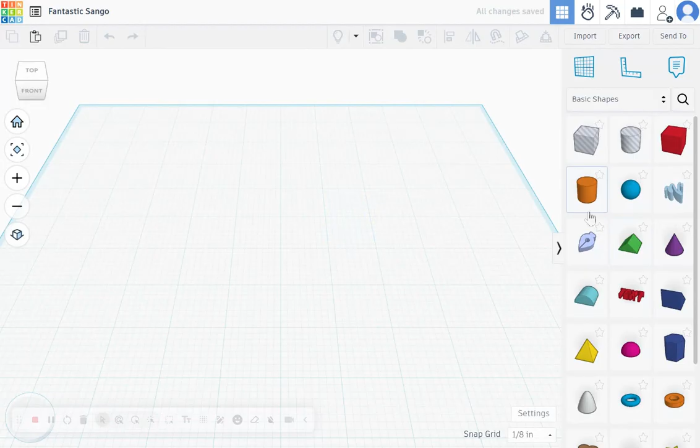When I'm in my design, the first thing I want to do is go up here to the top left-hand corner and give it a name. I want to include my first name and what I am making.

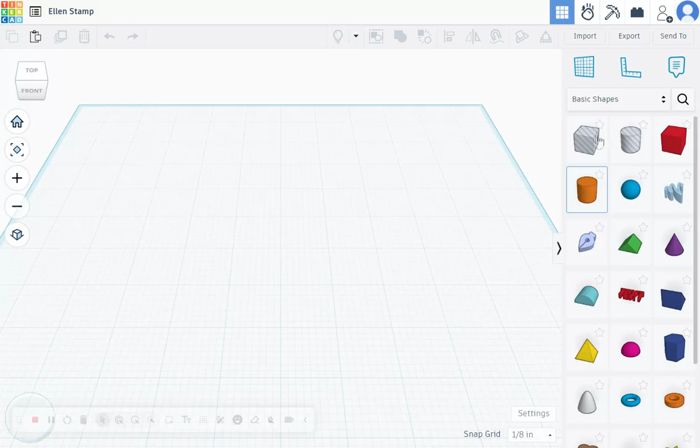Something like that. Now, I'm going to start my design with a cylinder. I'm going to go over here to my basic shapes, and I'm going to grab my cylinder and drag it out on my work plane.

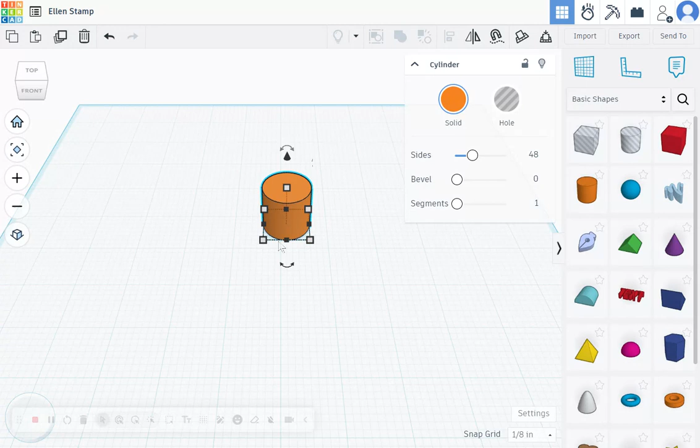I want this to be 1 inch by 1 inch because this is going to create the base for my stamp. So if I click on these corners, it tells me the dimensions. It already is 1 inch by 1 inch, but I only want it to be 1/8 of an inch tall. So I'm going to drag this box on the top down. There's 1/4 and 1/8. That is ready to go.

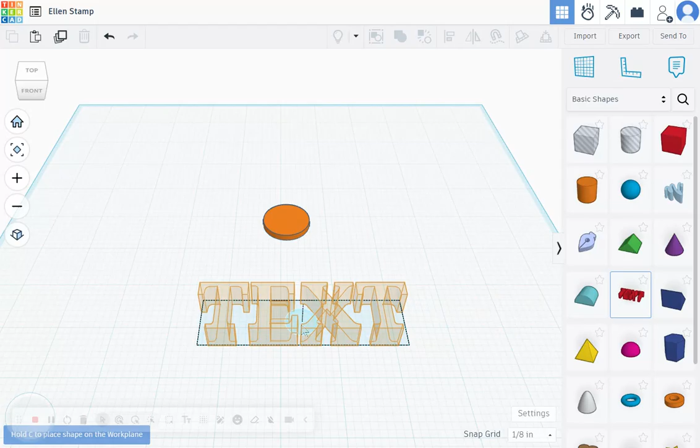Now I'm going to go and grab some text. This is where I'm going to put my initials. So I got it from the text area here. The font usually shows up as multi-language. This is too complicated of a font for me to use on ceramics.

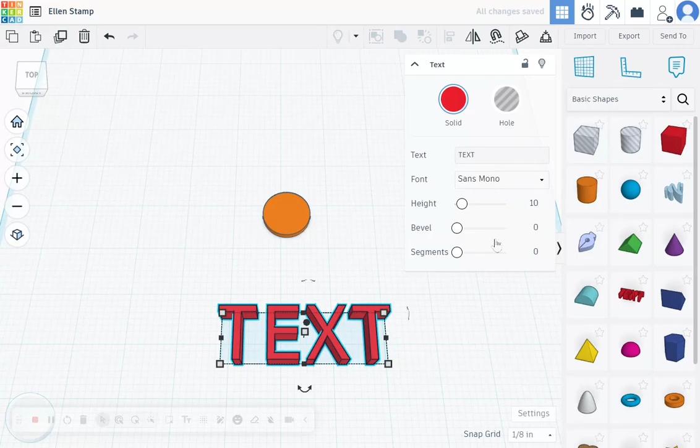So I'm going to change the font to Sans Mono. It's a much simpler font. Next thing I'm going to do, I'm going to click back on my text, is I'm going to change it to my initials. I want to make sure that I'm using capital letters.

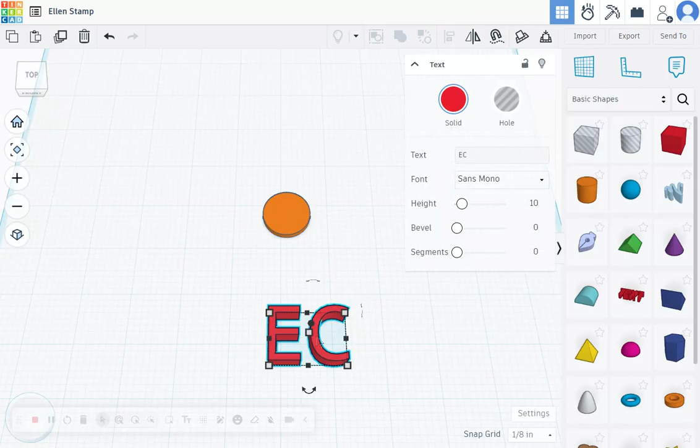All right. Now I need these initials to fit on this surface. So one thing I'm going to do is I'm going to drag these down until they're less than 1 inch in both directions, and it looks about right.

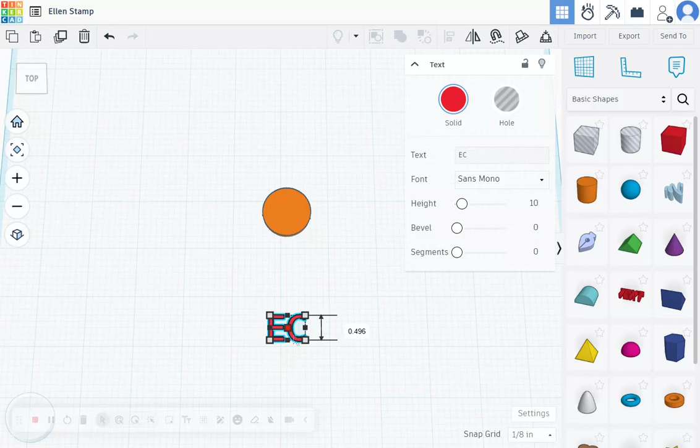Once I think it's right, I'm going up here to adjust my view a little bit. I'm going to grab these and move that up. And I'm looking around. It looks like it fits pretty well.

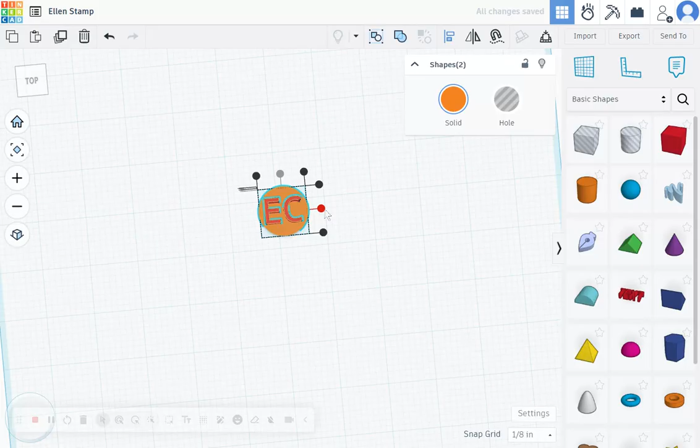I want to make sure it's centered. So I'm going to select everything that I've done so far. And I'm going to go up here to the Align tool and click on that. I want it to align with the center dot in both sides, so I'm going to click there and there. I was pretty close. Now it looks good from the top.

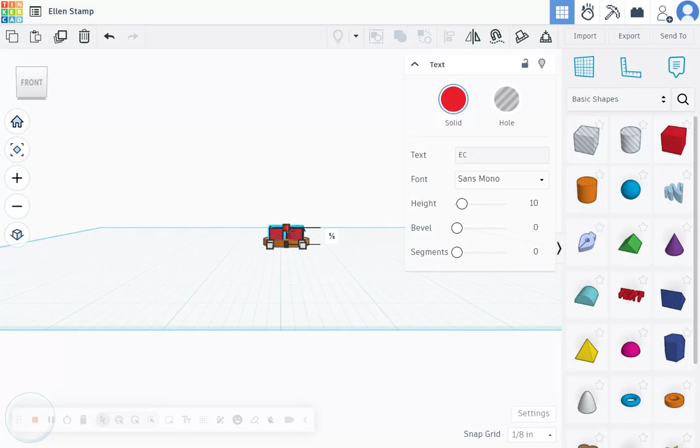I want to look from the side, so I'm going to go up here and adjust my view. That is way too tall. I only want my letters to stick up 1/8 of an inch. And since this is 1/8 of an inch, I want to drag this down to where it's 1/4 of an inch so that it sticks up less. I'm just going to grab this guide, the box at the top, and I'm going to take it to 1/4.

Now it looks how it should. It's going to make a nice imprint into the clay.

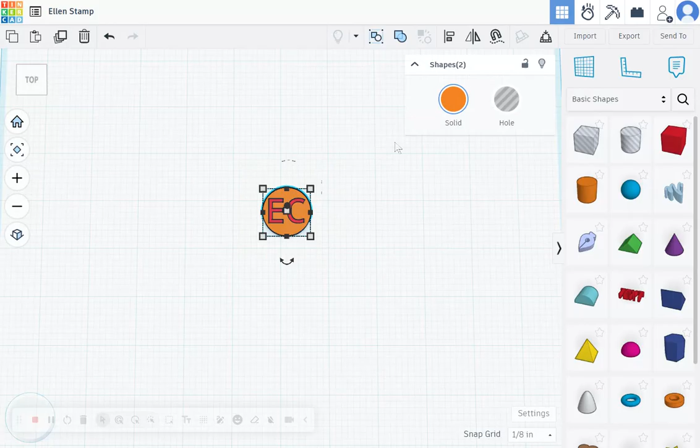Now when I imprint it, I'm going to get a mirror image. So I need to take everything and make it a mirror image. Before I do that though, I'm going to make it one object. So I'm going to drag a box over everything, and I'm going to go up here. Now this groups it, which means they'll travel together. And this joins it—it unionizes it, which means it becomes one shape. That's the one I'm going to use right now.

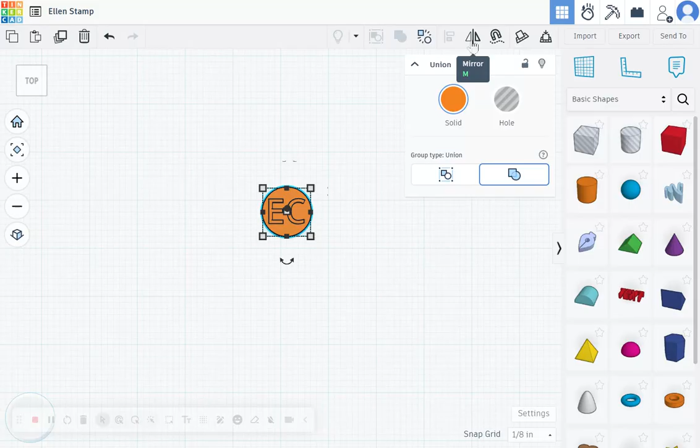Now the different colors disappeared. It's all one shape according to the computer now. I'm going to take my shape, and so that it prints correctly, I'm going to go up to the mirroring tool and click on that. I can choose to mirror it vertically or horizontally. I'm going to do horizontally by clicking this arrow, and it changes it to a nice mirror image that will work for my stamp.

To make my stamp easier to hold, I want to create a handle. So for the handle, I'm going to use this cone and drag it out.

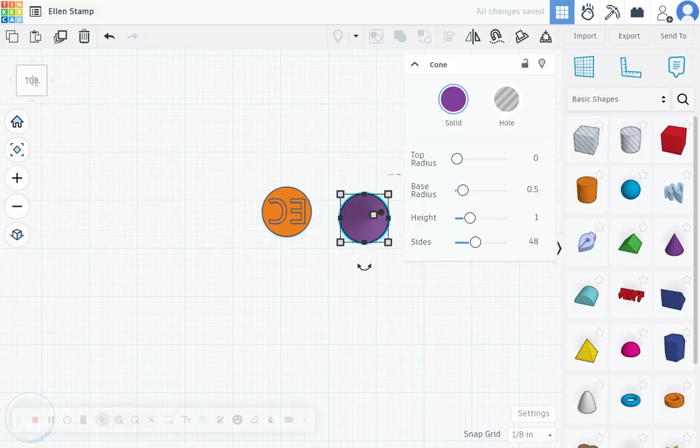When I look at the side view, I see that it looks pretty good, but I don't want that point on it. So what I'm going to do is get rid of the point using what we call a hole, which is basically a shape that is empty. So I'm going to drag this shape out, this little box.

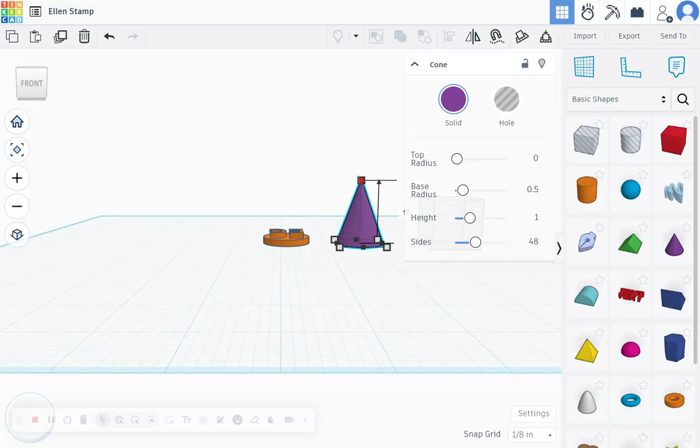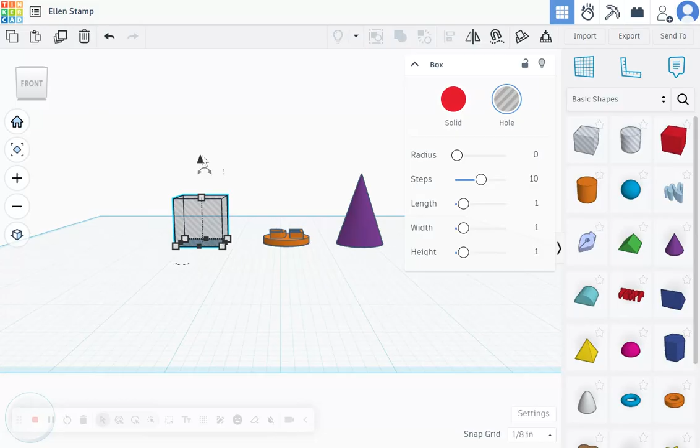Then I'm going to take this shape, the one I'm going to use for the hole, and I want this to be up above the plane, and you'll see why in a minute. This arrow up here at the top raises it above the plane, so I'm just going to pull this shape up until it's 1 inch above the plane.

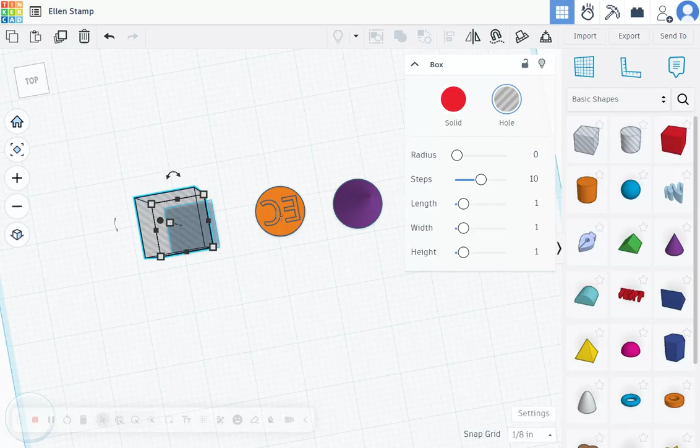I'm going to go to a top view now, and I want this and that to be centered together. So I'm going to move this out of the way. Oop, I resized it, so I'm going to do Control Z, Control Z. Now I'm just going to grab it. Now I want to move this over to this, so I'm going to draw a box around them.

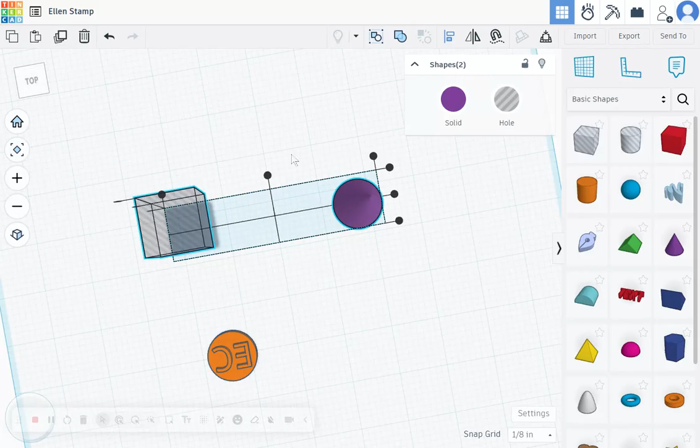And I'm going to use that Align tool that we used before. Oops, sorry, the Align tool. And I want to do Center. Center. Now when I look at the side view, I can see that the box is now all around the cone. And I'm going to hit the Union button like I did before, and that makes the shapes one shape, and that cuts the top off the cone.

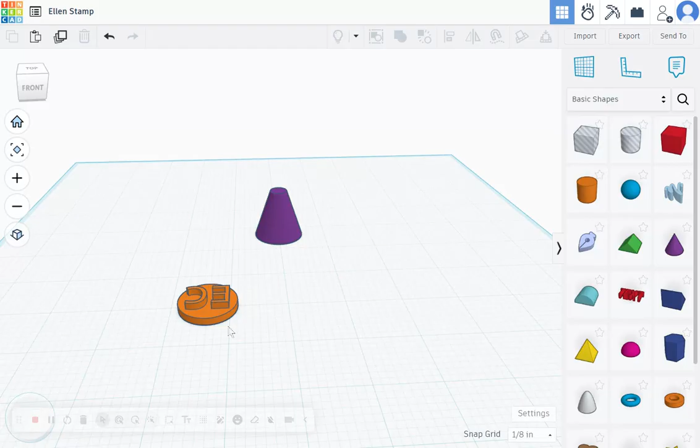My last thing that I'm going to do is put the head of my stamp on top of my cone. So to do that, now it needs to be above the plane by 1 inch, so I'm going to raise this one up. And there it says 1, so it's the height I want it to be.

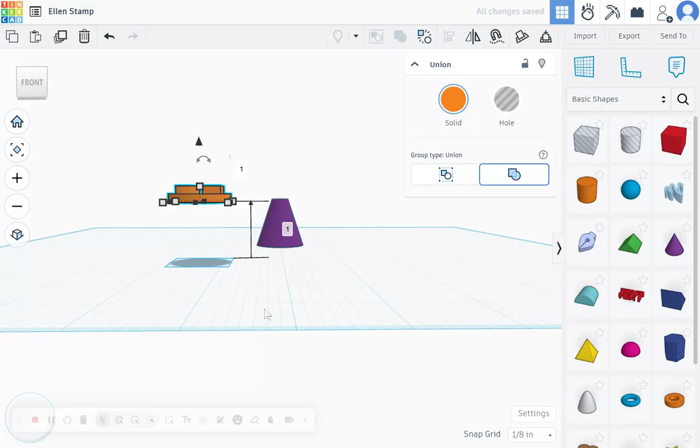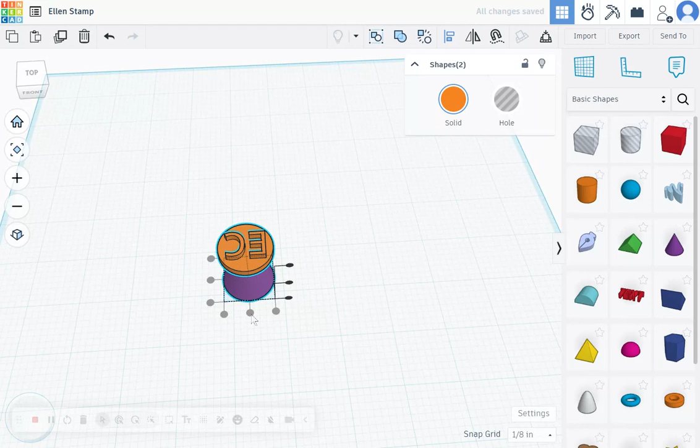When I look at the top, now I can grab both by drawing a box around them. And I'm going to use that aligning tool again, and hit Align, Center, Center, and that lines them up perfectly. My last step to finish this is I'm going to take this and use that Union tool again and turn it into one shape.

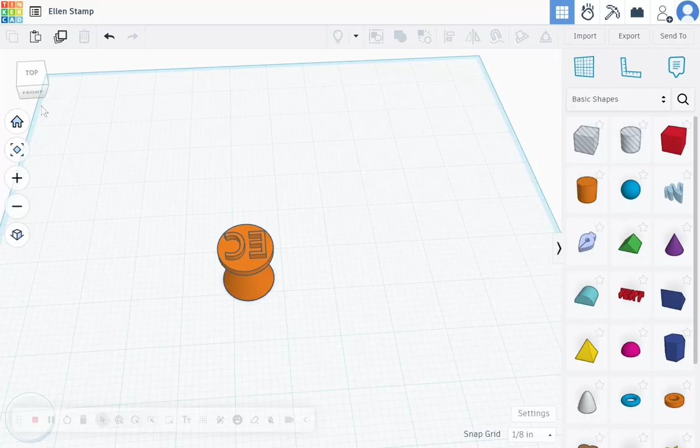It's ready to export now, so I'm going to give it one last look. This is what my stamp is going to look like. And I'm going to now export it, so I go up here to the button Export and hit Export. I want it to be an STL file. And now that STL file should be in your drive.